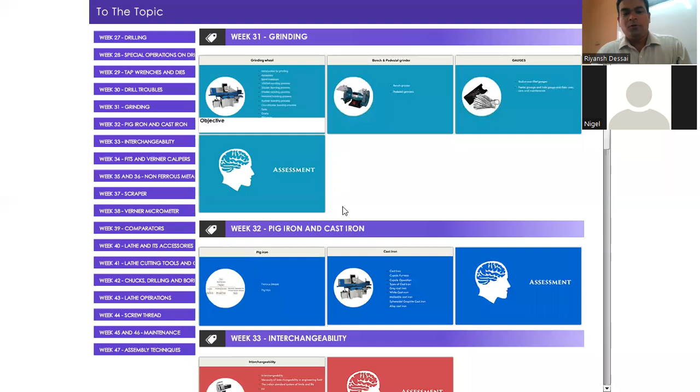In the last class, we explained about grinding machines, grinding wheels, and the different parameters used in grinding wheels, for example abrasive, wheel, grain size, bond, etc.

Now we'll see this in the software today. This is the picture you can see here. This is the surface grinder. This type of grinder machine especially uses a wide grinding wheel. Have you seen this? Like the aluminum oxide.

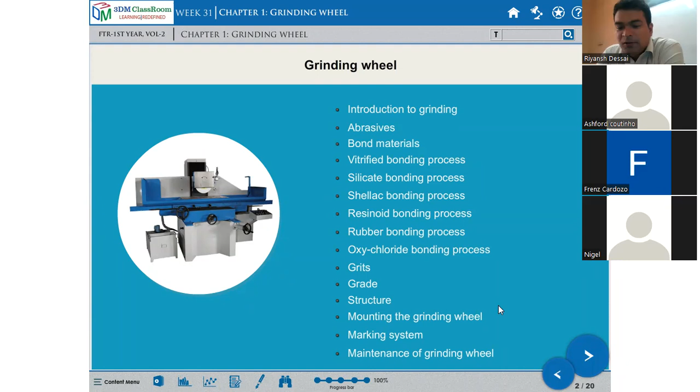Different grades of abrasive material, also I told you, artificial abrasive and natural abrasive. Silicon carbide and aluminum oxide are different abrasives used for making the grinding wheel. And how the grinding wheel is recognized, how you can identify it, how the grinding wheel is specified, that day also I told you.

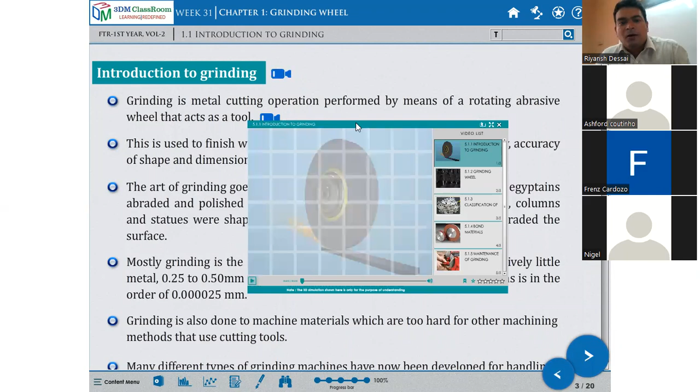This is a small video about the introduction of grinding. Introduction to grinding.

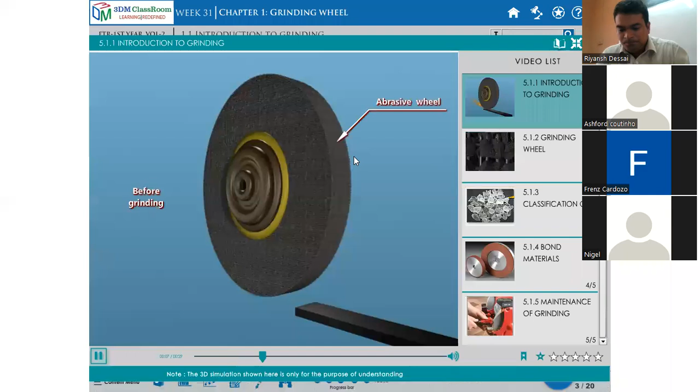Before grinding, workpiece. Grinding is a metal cutting operation performed by means of a rotating abrasive wheel that acts as a tool.

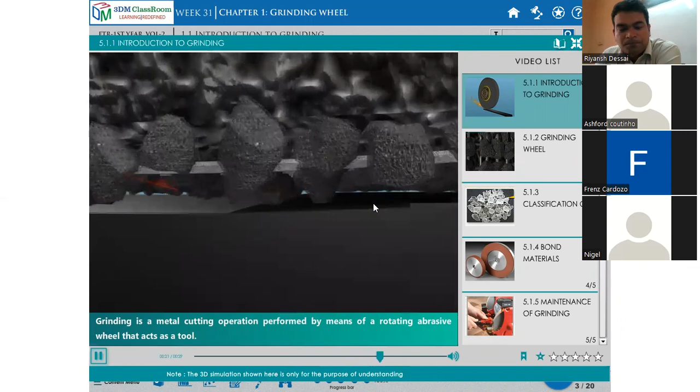These are the abrasive materials, and this is the bonding, which holds together all the abrasive particles. So it is natural or artificial, maybe sand, silicon carbide, aluminum oxide. There are different ones that exist, natural abrasive and artificial. With the help of that abrasive, grinding wheels are made.

Okay, so mostly they are silicon carbide or corundum stone metal used. So grinding is the metal cutting operation performed by means of a rotating wheel that acts as a cutting tool.

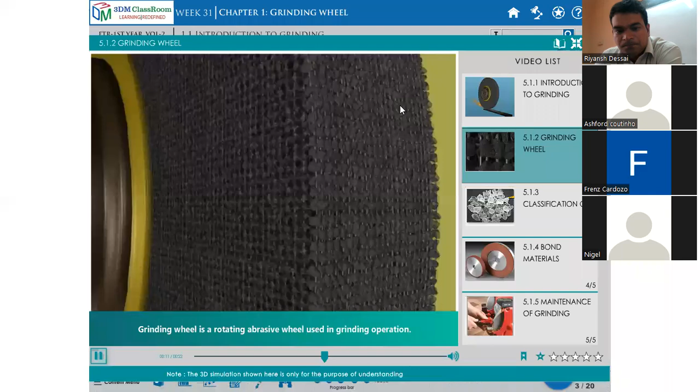This is another video you can see. Grinding wheel. Grinding wheel is a rotating abrasive wheel used in grinding operation. This grinding wheel is made by bonding the abrasive particles together.

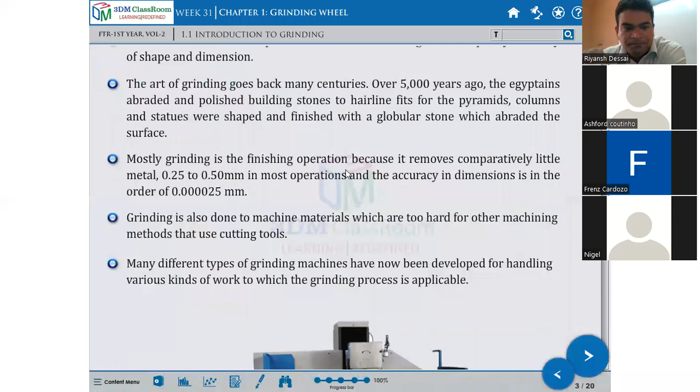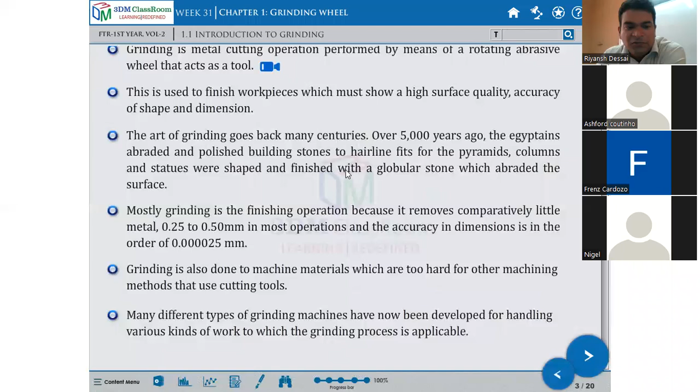So this is a grinding machine. The purpose of grinding is bringing the component to close size, to obtain required surface finish, and to machine very hard surfaces. This already I explained to you from my book that day.

Advantages of grinding, there are the following advantages of grinding. For example, surface finish obtained is superior. It is one of the most dimensionally accurate machining processes. Hardened components can be machined. Grinding permits the machining of light and delicate parts due to requiring little pressure.

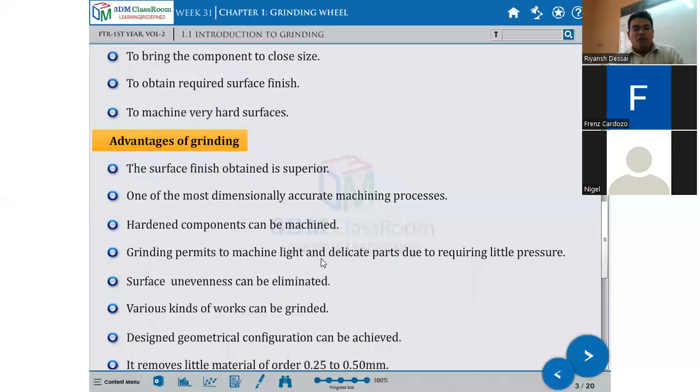Then surface unevenness can be eliminated. Various kinds of work can be ground. Designed geometrical configuration can be achieved, and it removes little metal, on the order of 0.25 to 0.50 mm.

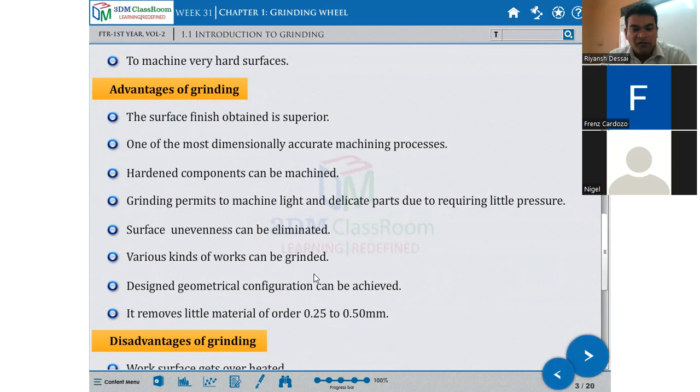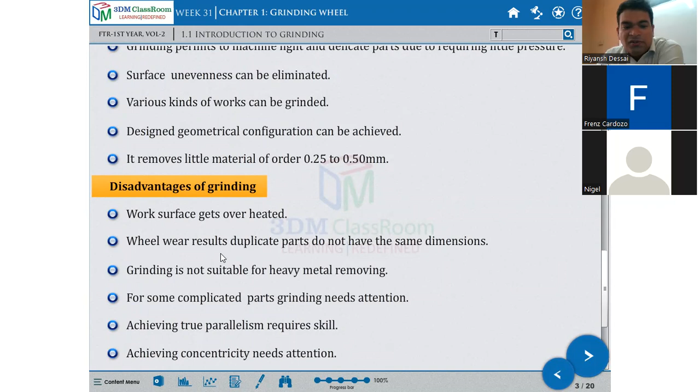These advantages you are also having with grinding. But the work surface gets overheated, wheel wear results, and duplicate parts do not have the same dimension. Grinding is not suitable for heavy metal removal, and for some complicated parts grinding needs attention. Achieving true parallelism requires skill, and achieving concentricity needs attention.

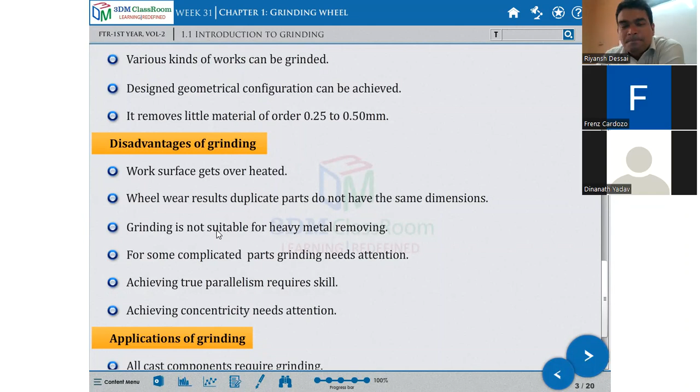Applications of grinding: all cast components require grinding. Welded components require grinding, and crankcase, forged components require grinding. Mostly grinding is applicable where there are cast components, so after casting you take the burr off and grind the component. Next, welded components, after welding the extra material you can grind off. Crankcase, forged components you can grind.

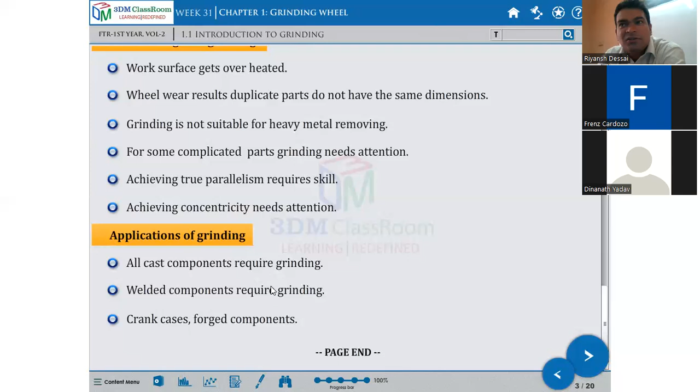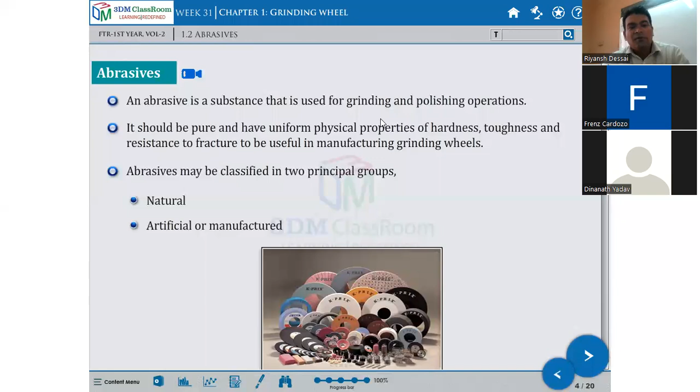Next is abrasive. Abrasive is a substance used for grinding and polishing operations. It should be pure and have uniform physical properties of hardness, toughness, and resistance to fracture to be useful in manufacturing grinding wheels.

Abrasives may be classified into two principal groups: natural and artificial. I already explained natural abrasive. Natural abrasive includes sandstone, solid quartz, emery, corundum, and diamond. These are the natural abrasives.

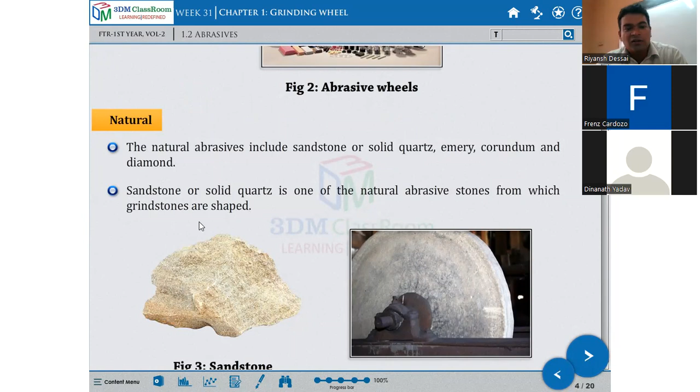Sandstone or solid quartz is one of the natural abrasive stones from which grindstones are shaped. The quartz cutting agent is shown in this picture. This is a natural abrasive available in nature. Being a relatively soft material, quartz cannot be used for rapid grinding.

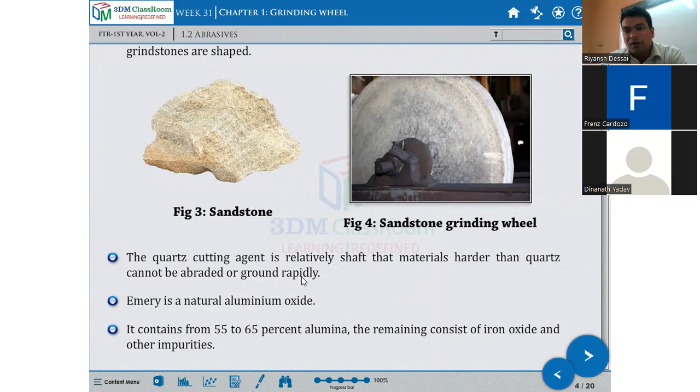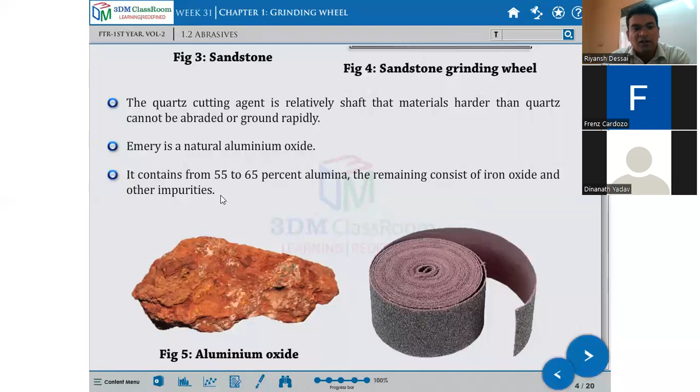Emery is a natural aluminum oxide. It contains from 55 to 65% alumina, with the remainder consisting of iron oxide and other impurities. So these are the natural abrasives. This picture shows emery sheets.

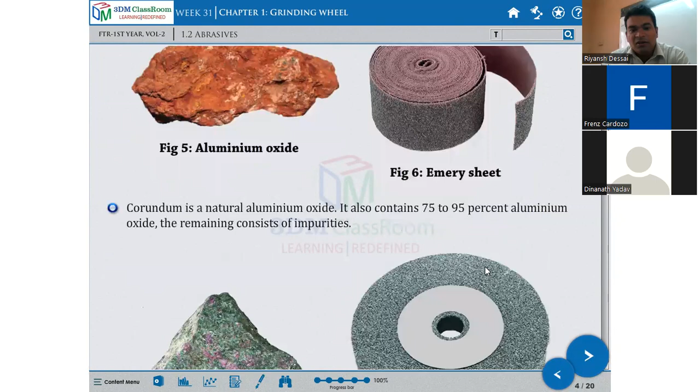Corundum is a natural aluminum oxide. It also contains 75 to 95% aluminum oxide, with the remainder consisting of impurities. This is a corundum stone, naturally available in nature.

Out of this stone, this type of grinding wheel is made. So I'm getting a grinding wheel made of corundum only. You can use corundum.

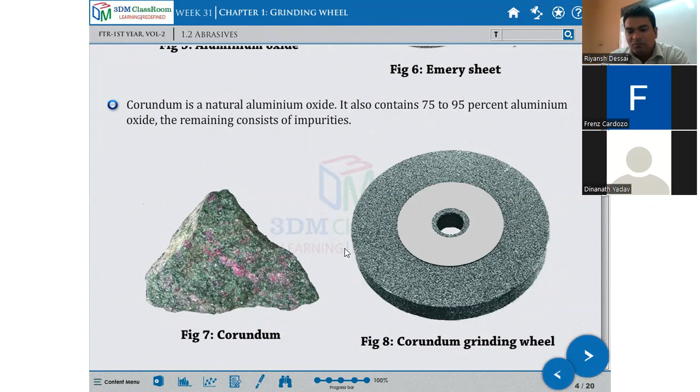Both emery and corundum have greater hardness and better abrasive action than quartz.

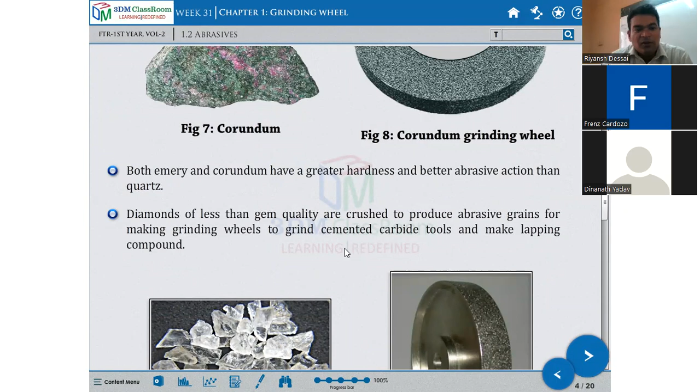Diamonds of less than gem quality are crushed to produce abrasive grains for making grinding wheels to grind cemented carbide tools, and to make lapping compound. These are some raw diamonds used to make diamond grinding wheels - you can make this type of grinding wheel.

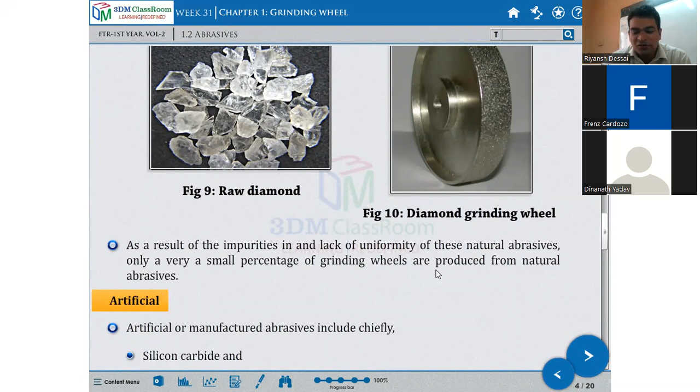As a result of impurities and lack of uniformity in natural abrasives, only a very small percentage of grinding wheels are produced from natural abrasive.

Now moving on to artificial abrasive. Artificial or manufactured abrasive includes silicon carbide and aluminum oxide.

Silicon carbide abrasive is manufactured from 56 parts silica sand, 34 parts powdered coke, 2 parts salt, and 12 parts sawdust in a long rectangular electric resistance-type furnace built up of loose bricks. This type of silicon carbide is manufactured in a furnace: 56 parts silica sand is mixed with 34 parts powdered coke, 2 parts salt, and 12 parts sawdust. All this is mixed and put into the furnace to form the grinding abrasive.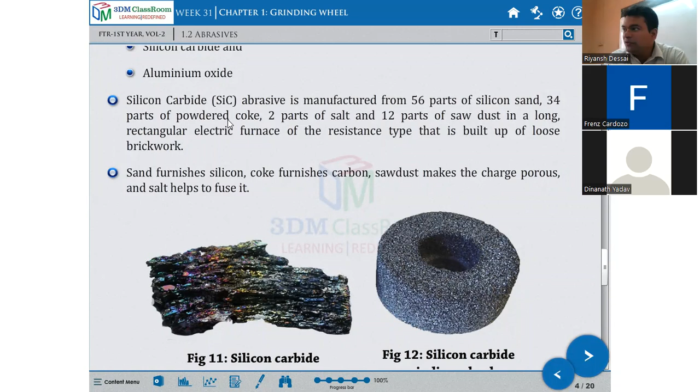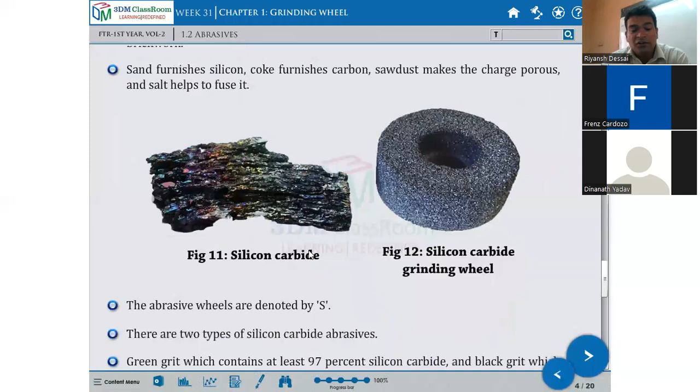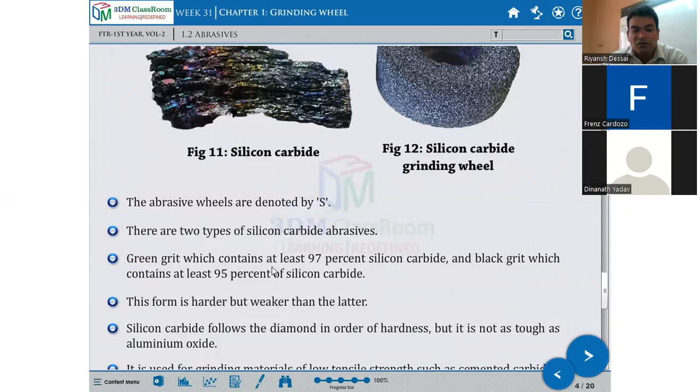Abrasive wheels made of silicon carbide are denoted by the letter S. There are two types of silicon carbide abrasive: green grit, which contains at least 97% silicon carbide, and black grit, which contains at least 95% silicon carbide.

This form is harder but weaker than the latter. Silicon carbide follows diamond in order of hardness, but it is not as tough as aluminum oxide. Aluminum oxide is very tough.

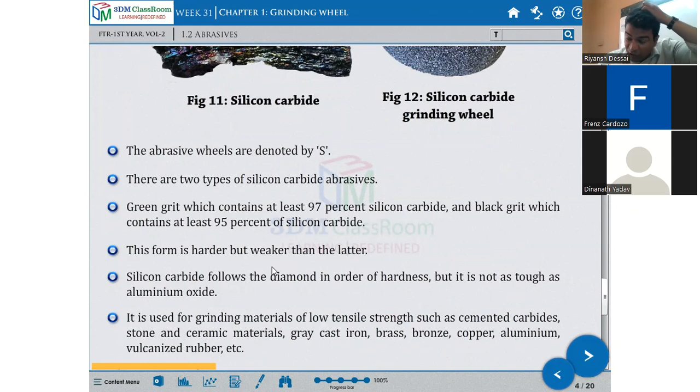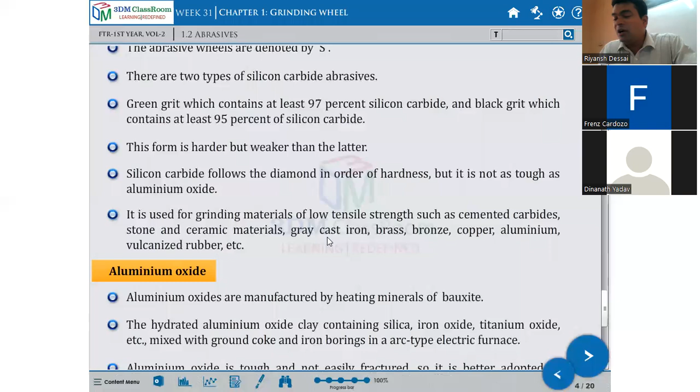Silicon carbide is used for grinding materials of low tensile strength such as cemented carbide, stone, ceramic materials, gray cast iron, brass, bronze, copper, aluminum, and vulcanized rubber - these can be ground using this type of abrasive particle.

The second artificial abrasive material is aluminum oxide. Aluminum oxide is manufactured by heating bauxite. Hydrated aluminum oxide clay contains silica, iron oxide, and titanium oxide mixed with ground coke, and is processed using iron boring in an arc type electric furnace.

It is again put into a furnace - both silicon carbide and aluminum oxide are produced using a furnace for this type of artificial abrasive.

Aluminum oxide is tough and not easily fractured, so it is better adapted to grinding metals of high tensile strength such as steel, carbon steel, high-speed steel, annealed malleable iron, wrought iron, and tough bronzes.

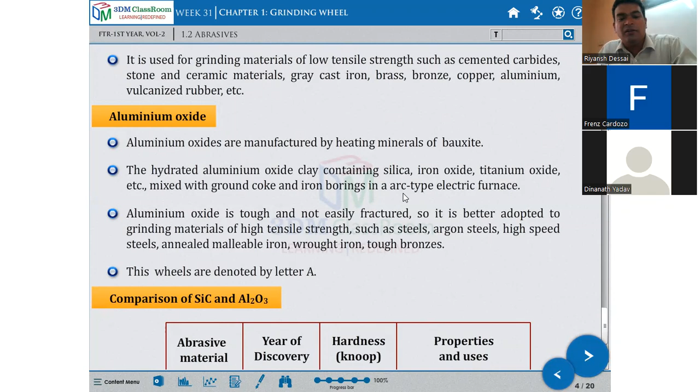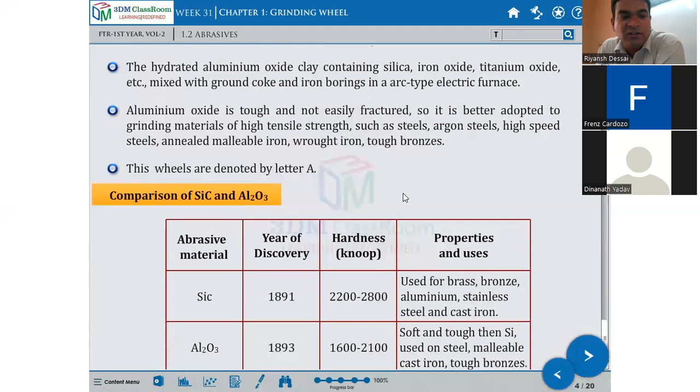These wheels are denoted by the letter A. Silicon carbide is denoted by letter S and aluminum oxide is denoted by letter A.

Now the comparison of silicon carbide and aluminum oxide. Silicon carbide abrasive material was discovered in 1891, with hardness up to 2,200 to 2,800, used for brass, bronze, aluminum, stainless steel, and cast iron.

Aluminum oxide was discovered in 1893, with hardness of 1,600 to 2,100. It is softer and tougher than silicon carbide, and used on steel, malleable cast iron, and tough bronze.

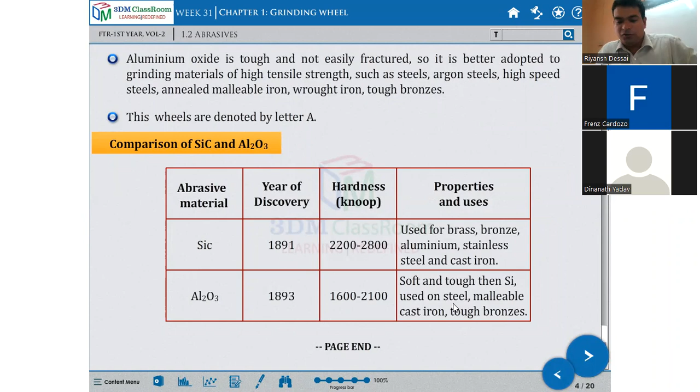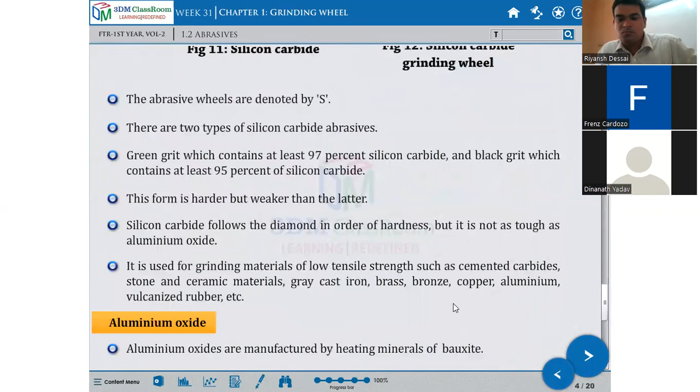Now, what is meant by bond? Bond is what holds the abrasive particles together.